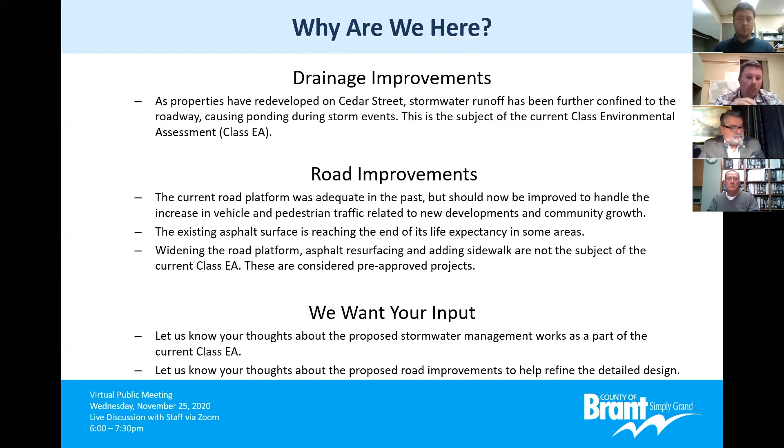And we want your input. We've divided this point out into two separate bullet points because we want your input specific to the stormwater improvements and specific to the road improvements.

So we'll run through a quick outline. We're going to cover the Class EA process. Stormwater management is the first priority for this meeting, so we'll talk about that first: the existing conditions, the problem statement, the alternatives we've identified, and the recommended preferred alternative. Then we'll jump over to road improvements, other considerations like water and sanitary servicing and street lighting, and then we'll cover the next steps and the project schedule.

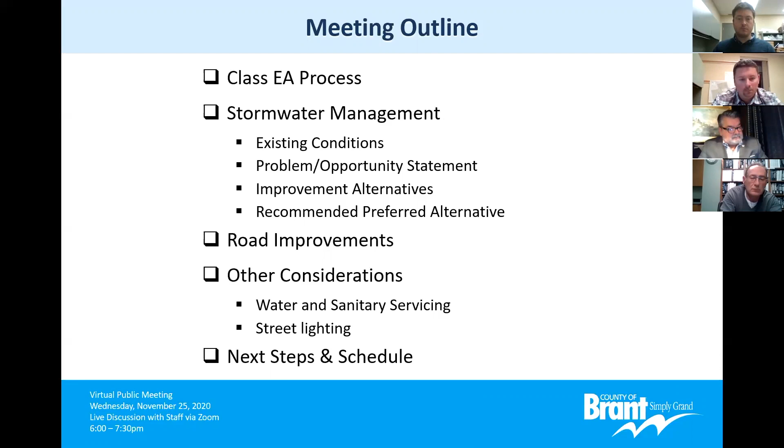Jumping into the municipal Class EA process, if you've been to one of these public meetings before you're familiar with this image. This diagram shows the process we need to follow for any larger scale municipal project. There are Schedule A, Schedule B, and Schedule C projects. Schedule C projects must go through phases 1, 2, 3, and 4 before moving into phase 5, which is implementation, design and construction. Schedule B projects only need to go through phases 1 and 2 before advancing to phase 5. Schedule A or Schedule A plus projects are considered pre-approved.

They're the simple projects, like repaving a road, something kind of an everyday occurrence for us. So they're pre-approved, but we still want your input on those things.

So we initiated this Class Environmental Assessment as a Schedule B project because of the possibility that we might not be able to fit everything for stormwater in the road allowance. If we need to go outside of the road allowance, that bumps it up to a Schedule B project. So that's the process we're following for this project, even though some of the projects fit into the Schedule A category.

So where we are here tonight is phase 2. If you look under phase 2 at the yellow highlighted box, this is the point of contact where we reach out to the public and ask for your input on what we've prepared so far.

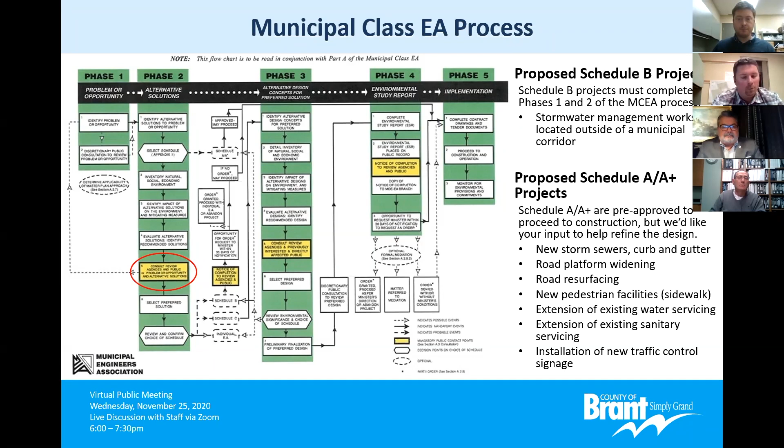Okay, covering the stormwater existing conditions, this is an aerial image of Cedar Street, and it's a little outdated. To the west there are two vacant land parcels that are actually fully developed now into condo developments. You'll also notice there's really no stormwater piping on Cedar Street. The storm sewers in the area are shown as the green lines - you'll see some on Rest Acres Road, some on Laurie Ann Lane, just coming down to Cedar Street. So there's really nothing there yet.

Storm sewers are generally designed to handle a 5-year storm flow, to carry that water away without ponding on the road, and there are usually some overland flow routes determined as well. Cedar Street really doesn't have any of that. And I'm sure, as residents have seen many times, that water doesn't really have anywhere to go, so it ponds in several areas of the street.

Because we don't have stormwater management on Cedar Street, all of these new condo developments have been required to handle their stormwater flows and runoff on their own site. So what they're doing is infiltrating all of that - holding it in ponds and infiltrating it into the ground.

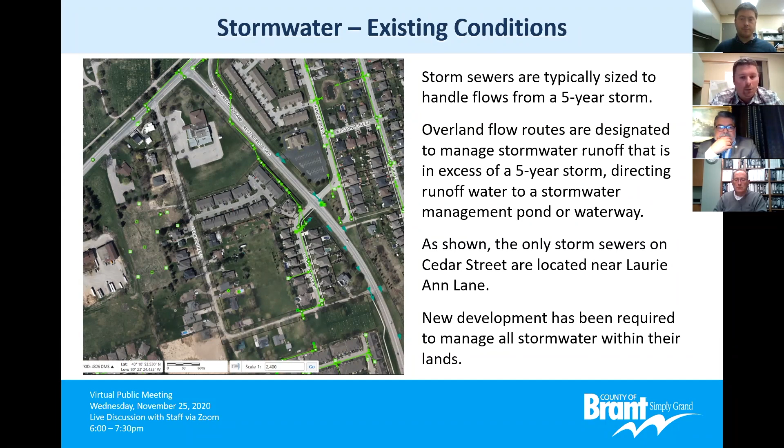Next slide here. So as I mentioned, Cedar Street doesn't have any storm sewers extended to it yet. These are some areas where I've observed ponding during heavy storms, probably a 5-year storm. I've heard from some residents that this is fairly accurate - they might be a little bit bigger, a little bit smaller, and maybe shifted a little, but generally this is what you see during a storm event. The storm flows generally divide Cedar Street into a south drainage area and a north drainage area.

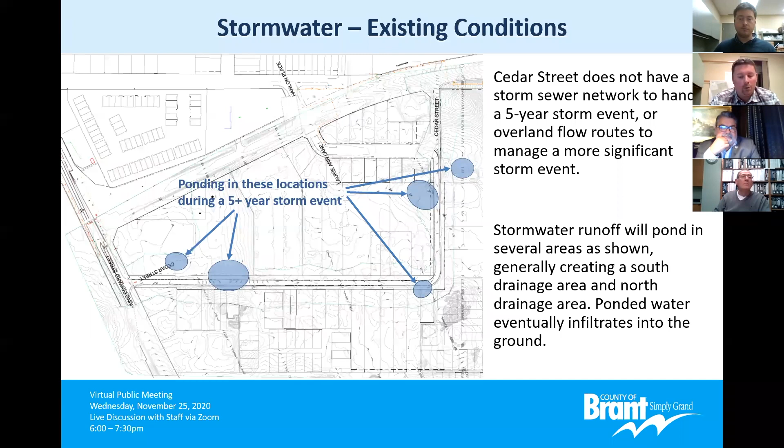So this brings us to our problem or opportunity statement. I'll just read through it. I know it's a little bit long, but I'll read through it.

Road improvements are required on Cedar Street to provide a safe corridor for all road users. An urban road cross section will be implemented with a wider road platform, curbs, gutters, and sidewalk. As a result of the planned roadway improvements, there will be a need for improved stormwater drainage on Cedar Street to prevent long-duration ponding in the roadway and on adjacent properties. The objective of this study will be to identify the most preferred alternative that is technically sound, cost-effective, socially acceptable, and environmentally responsible.

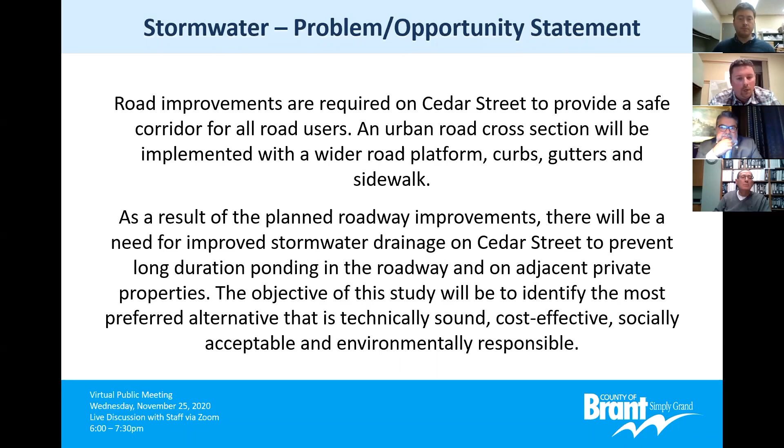So we developed a few different alternatives that we think are reasonable and practical for Cedar Street. The first one is do nothing. That's the alternative that we always have to consider in class environmental assessments, just considering it as a baseline that we compare all the other alternatives to.

Number two is implementing some stormwater management and drainage improvements within the Cedar Street road corridor, and that could include storm sewers, controlled ponding in some areas, or low impact development features. That's generally trying to infiltrate as much water into the ground.

Number three would be stormwater management and drainage improvements outside of the Cedar Street road corridor, like if we can't fit it all in the road corridor, do we need land to do other things with, possibly a dry pond or a wet pond, something to hold the water, and also low impact development features outside of the road corridor. So it's the same as two, but outside of the road corridor.

And number four is actually a combination of numbers 2 and 3, where we have storm sewers or low impact development features in the road and also outside of the road.

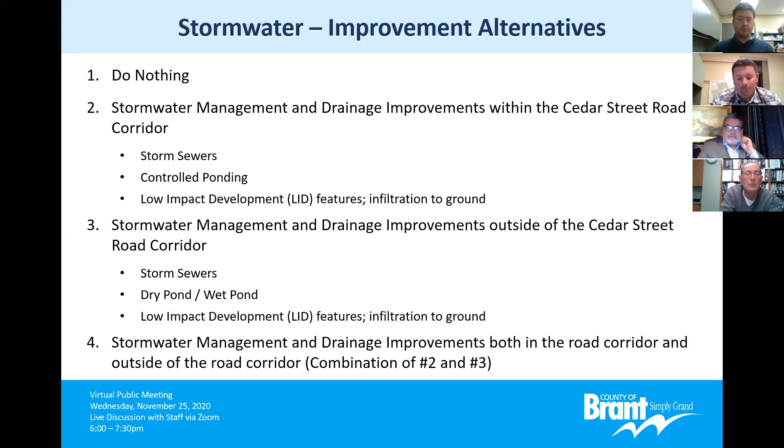There are also social and cultural factors that we weigh these alternatives against: the construction activity and the disturbance to all of the residents and property owners, the land use requirements, whether there are archaeological or heritage resources that we need to factor in, and whether there's any impact to community events.

Of course, we consider natural environment factors like disruption to the terrestrial landscape or ecosystem, the effect on surface waters and the receiving stream, or the impact to the groundwater, and whether we're considering climate change in our design as well.

And last but not least, economic factors. We always have to consider the capital costs, operation and maintenance costs, long-term costs, and whether there's an impact to the local economy.

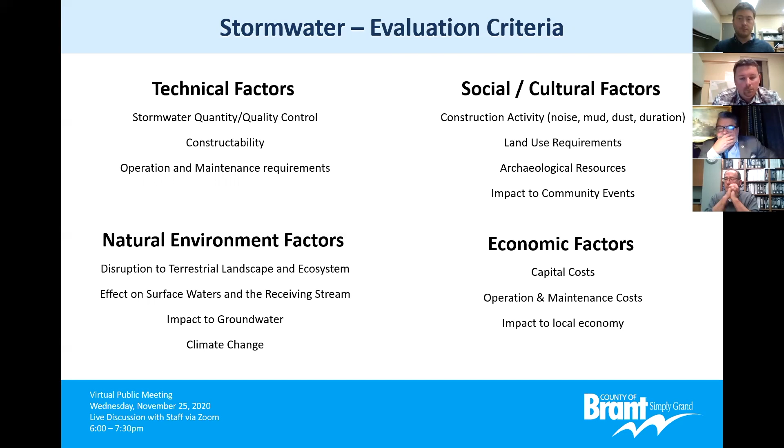Considering these two areas separately, we looked at the south drainage area first. The first alternative doesn't satisfy the problem statement, it doesn't solve the problem. The second alternative would satisfy the problem statement, and we can fit everything within the road corridor.

The third alternative outside of the Cedar Street road corridor isn't a possibility because there's no land available for that. Everything's privately owned. There's nowhere to really put a pond or a low impact development feature outside of the road corridor, and that rules out number 4 as well.

So because we have an existing storm outlet at Laurie Ann Lane and we can fit everything in the road corridor, that's the preferred alternative that we're recommending.

So that would look like storm sewers connecting to the storm sewer at Laurie Ann Lane. We're recommending a swale on the north side of Cedar Street against the vacant land there that's going to be developed in the very near future, and some LID features like an infiltration gallery under that swale or ditch against that development property on the north side of Cedar Street.

Now, because we're recommending that as the alternative for the south drainage area, that's actually a Schedule A+ project because it's all within the road corridor, so a pre-approved project.

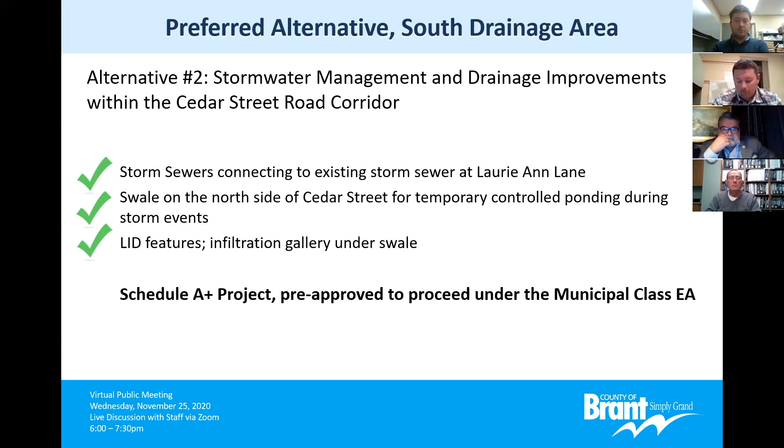But moving to this, this is what it would look like here. The drawing showing the detail on the road is a little outdated, but what this slide is supposed to be showing is just a drainage swale, or what's going to look like a ditch on the north side of Cedar Street, and outletting over here at the existing Laurie Ann Lane storm sewer.

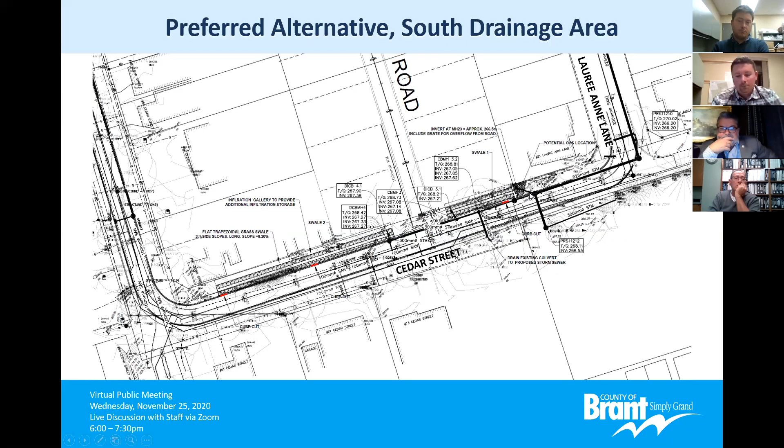Moving over to the north drainage area, do nothing, again, doesn't satisfy the project's problem statement.

Number two, we will have to implement something in the roadway. We need sewers to convey the flows to wherever our outlet needs to be, but we can't fit everything there because there's no outlet at the north end of Cedar Street. There are existing sewers on King Edward, but they are too high to pick up the flows from Cedar Street.

So we've investigated alternative outlets.

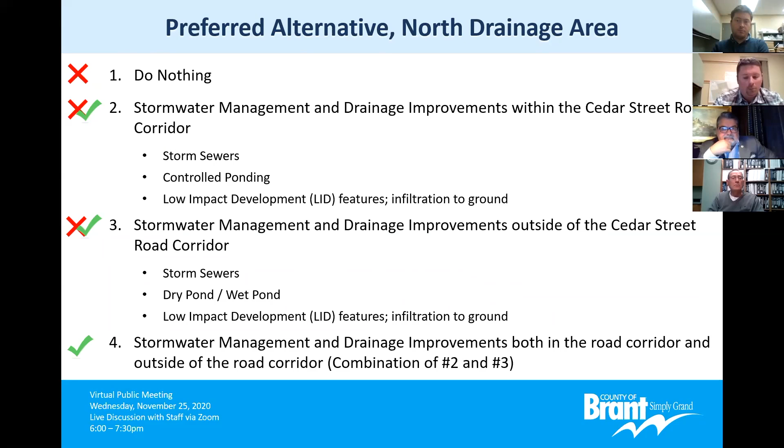That needs to be part of the solution because we need lands outside of the road corridor, but that doesn't fully satisfy the problem statement because we need some infrastructure in the Cedar Street road allowance to bring it to the outlet. So we're suggesting a combination where we install sewers on Cedar Street, but we do need some use of private land to get there, and I'll show you what that looks like here.

So storm sewers on Cedar Street and through the Cedarview Church property, connecting to sewers on Rest Acres Road. Because the existing sewer on Rest Acres Road is nearing its capacity, we can't just dump everything into that sewer. We need to hold water, both at the south end and the north drainage area as well, so we do need to pond some water, temporarily hold it, and let it slowly flow back into the sewers when there's capacity available after the storm event. While it's being held, it will also infiltrate both at the south and these ponding areas at the north.

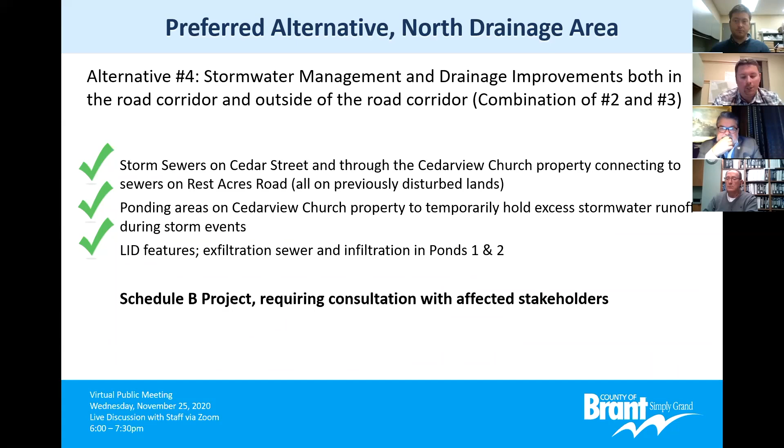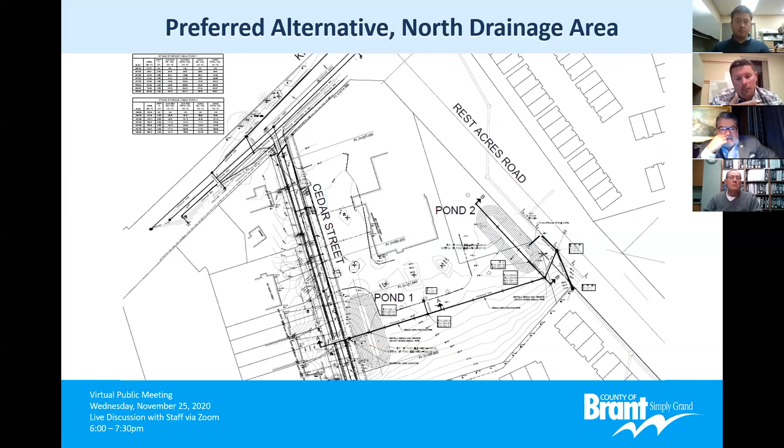We're recommending some LID features, an exfiltration sewer, infiltration ponds, and this is what that looks like conceptually. I know there's some detail we can't really see on the slides here, but what we're trying to show is a sewer going through the Cedarview Church property, connecting to existing sewers at Rest Acres Road, and then two ponding areas on that property, one close to Cedar, where it already ponds right now, and one a little bit closer to Rest Acres Road. The water will temporarily pond there, and in less than a day, it'll flow back into the sewers.

This is just an overview showing the overall plan here. We're suggesting storm infrastructure at the south end of Cedar Street, flowing into Laurie Ann Lane, and then a divide between those drainage areas right here, with everything flowing north along that green line up to a ponding area flowing across the church property. These are acting as surcharge ponds for whatever excess flow the existing sewer on Rest Acres Road can't handle, and while the water is ponded there, it'll infiltrate into the ground a little bit as well.

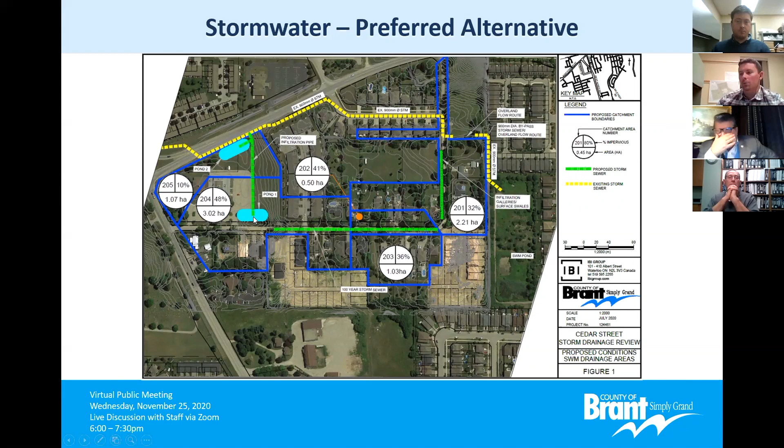That was just a very brief overview of what the recommendations are. If you like the details, we do have a stormwater management report in draft form available on the county website. It has all the details on how they modeled everything. We've modeled a 100-year storm, and we've calculated that this will handle flows from a 100-year calculated storm.

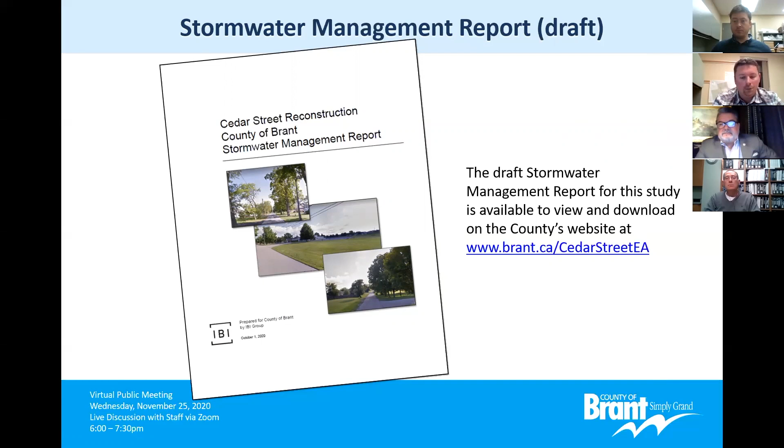Okay, so that covers the Schedule B portion of the class environmental assessment on the stormwater management side. But this project includes more than that. Like I said, they're mostly Schedule A projects, but we want to present them to all the property owners and all the road users here and get some input. So that includes some planned road improvements, extending water and sanitary servicing where it's missing right now, and improving the corridor for pedestrian and cycling through Cedar Street.

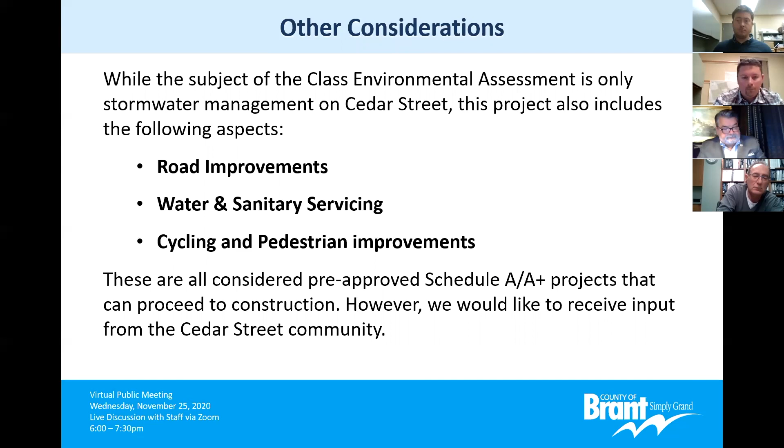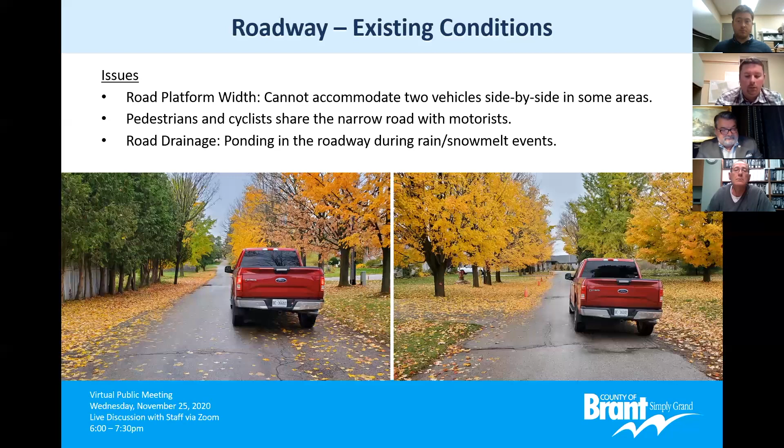Moving ahead to the roadway existing conditions, I've shown a photo there with one vehicle. We all know that Cedar Street is very narrow at the south end, even as you go north—too narrow to fit two vehicles. You can see vehicles right up onto the front yards of some of those homes, and it's not ideal for pedestrian use either. So we're proposing that we widen the platform of the road, not significantly, just out to about 7 meters, but then install a sidewalk to the side as well to improve safety for pedestrians.

Sidewalk on the west side, and at the south end it'll be on the south side, so it goes around the outside of the bend on Cedar Street. And on the south end, another typical cross section.

This one is showing that drainage swale that I mentioned as well. This is maybe a little bit exaggerated, it's not as deep as it looks. The slopes are 3-to-1, so the grass can be cut easily with a riding lawnmower.

Below that is an infiltration gallery, shown here as clear stone bedding. Water ponds there temporarily, less than a day, and runs back into the sewer when the sewer can take it. In the meantime, as it's ponding, it also infiltrates into the ground.

Again, the sidewalk on the south side, and that sidewalk will run all the way to connect over to Rest Acres Road.

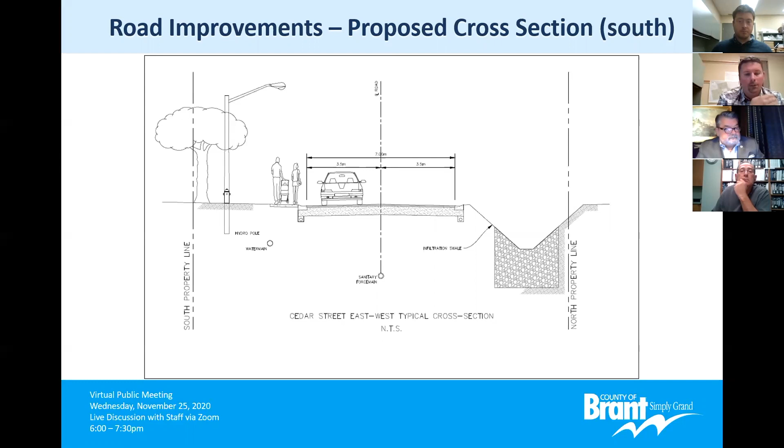Water and wastewater servicing extensions. Cedar Street already has a water main looped through it, but not all properties have a water service connection. So as part of this project, while we're ripping up the road, we'll be extending a water service to all of those unserviced properties.

Similarly, Cedar Street has a sanitary sewer on the north-south section, but it ends just north of the bend on Cedar Street. We can't extend that gravity sewer any further, it's very shallow where it ends.

So what we need to do is extend a common sanitary force main beyond that sewer to the south to service all the properties at the south end of Cedar Street. They'll all need to be on a grinder pump package. We'll talk to all those homeowners individually since it doesn't apply to everyone.

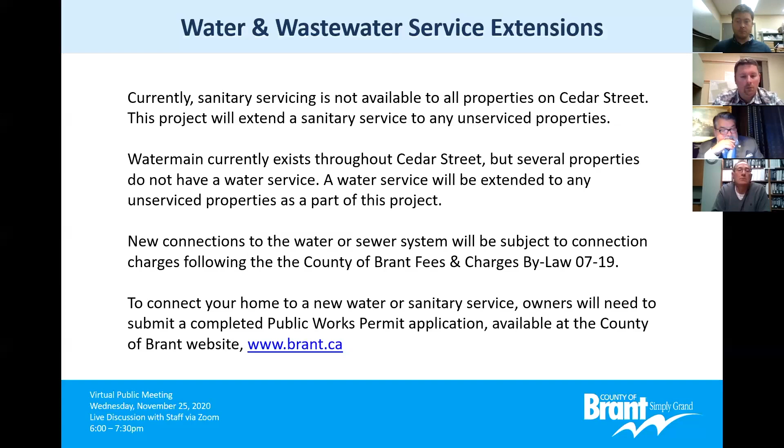After this project, water and sewer services will be available to everyone, and new services will be subject to connection fees per the Brant County Fees and Charges Bylaw 07-19, which we can provide as well. To connect your home to the water or sanitary service, owners will need to complete a public works permit application. We'll provide more information after all of the work is done to everyone who's affected.

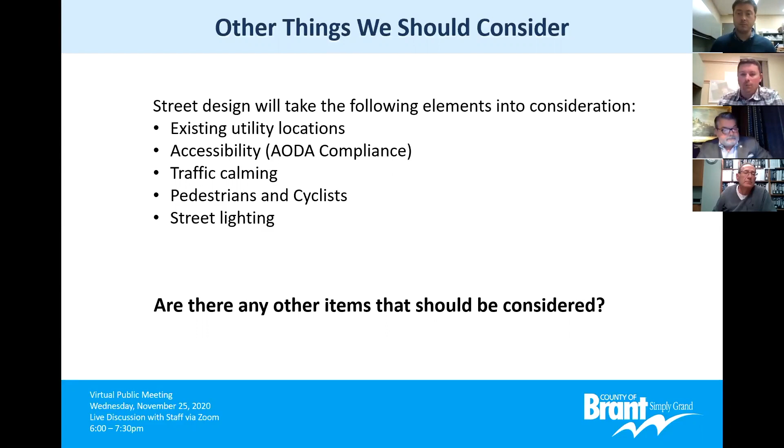In high volume storms, like a 100-year storm, there'd be water sitting around for days currently. We're hoping that in the future it'll be pretty much gone in a day. There's really no way to take this water away instantaneously without having a huge pipe all the way down to the Nith River, and that's not something the Ministry of Environment or the GRCA considers acceptable practice. Just in case anybody was wondering why that's required. Thanks, Rob.

We've tried to anticipate some of the questions residents might have about the project so far - I think we have six here. The first one is, how many trees will be removed? Trees will be saved whenever possible, but a few will need to come out.

There's one large tree at the corner, right at the bend of Cedar Street, that needs to come out because it's in the way of the bend. There's also a row of cedars and a couple more as you go north, and they should be shown in the drawings as a conflict. Whenever we can save the trees, we're trying to, but there are a few that will have to come out.

How long will construction last? If we can go ahead and do it in the summer and get good summer weather, this should be a 2-month project, not including some of the restoration work that usually carries on for a couple months after. But the bulk of the work, where the contractor's working in the road and it's very messy, should be 2 months.

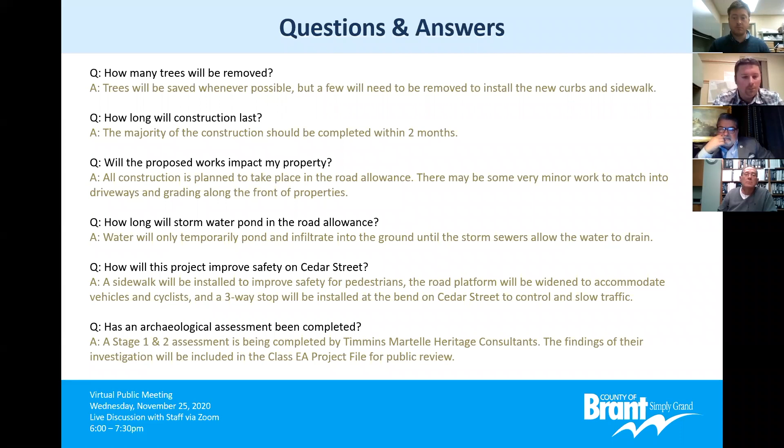And just a summary, why are we here right now? The time is right. We want to improve the safety of the road, widen it out, add some sidewalks. But when we do that, we also want to improve the stormwater drainage, and that requires us to follow the municipal Class EA process. Because we're proposing something that's outside of the road corridor, it bumps it up to a Schedule B project, which is why we're here tonight.

We want to receive your input related to that stormwater component, but we also want to receive your input related to the Schedule A projects, like the road work, the sidewalk, street lighting, water and sewer extensions, all of those other things.

Next steps: we'd like to receive your comments for the remainder of November and the month of December. We'll need to complete the archaeological assessment through December and into the new year. We'll finalize the project file for the stormwater component, put it out for a 30-day public review period in January or February, and then proceed with detailed design through the winter months and hope for construction in the spring or summer of 2021. That's our goal, is to be out there digging next summer.

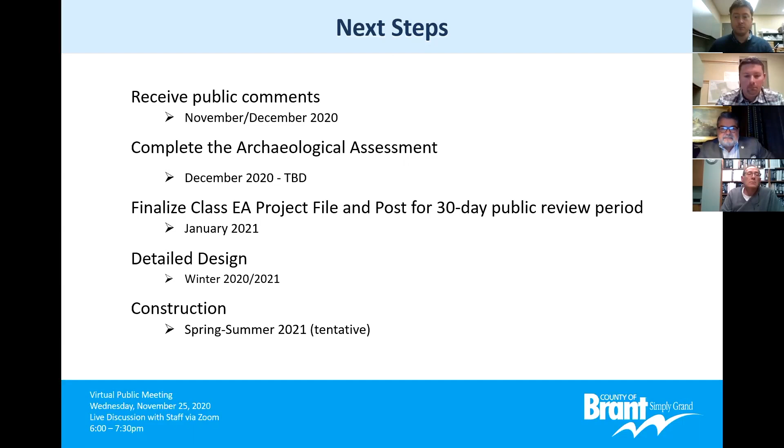Like I said, we want your input. There's two methods tonight: submitting your questions so we can open up the floor for questions, but then also the comment sheets that are available for download. You can fill them in Microsoft Word by typing it in, or print it out and handwrite it in, email it into our office, or drop it by our office. We'd like to hear from you. Hopefully we're on the right track.

And with that, maybe we'll look at the questions again. Okay, so some have been answered already. Yeah, I answered some of the easy ones. Oh, thanks, Rob. Perfect.

So will the dry pond be the one at 23 Cedar that's already existing? Can it maintain a large degree of water? If so, no, the proposed ponds are on the church property. That's right.

So the hydro lines are staying above ground. Yeah, that's correct. Will there be street lighting added? Yes, that's the plan.

The plan is to increase the road width to 7 meters. What is the current width? It varies - thanks, Rob - 5.5 to 6 meters.

Will this project take place in 2021 or 2022? Thanks, Nick, you got that one. So the plan is for 2021 unless something slows us down for some reason.

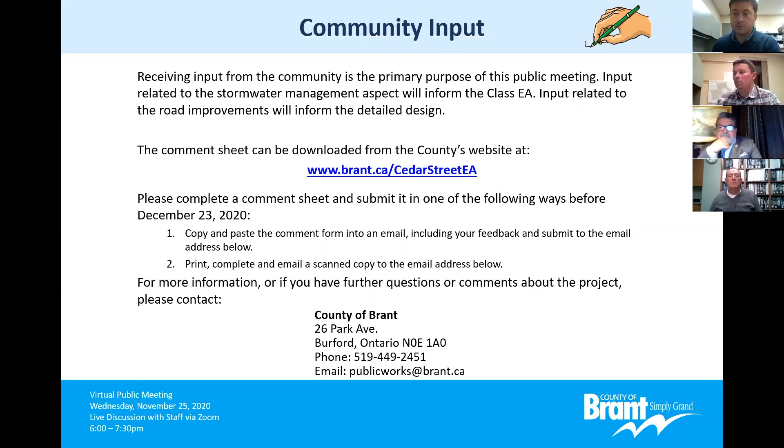As far as clearing the snow, that's a good question, we will have to look into that. That sidewalk will be cleared by county staff because it's part of the major trail. We also will be clearing the new multi-use trail on Rest Acres when it's constructed. I think part of it's constructed now and part isn't. Certainly the construction on Rest Acres Road will not be entirely finished this year, but it is going to be open to traffic for the winter. The final construction of the last two roundabouts, the last sections of the four-laning, and all of the landscaping will happen in 2021.

Robert, are you saying that the sidewalk on all of Cedar Street would be cleared, or just that section? That section and the closed section of the road. Just the closed section, yes. Okay, thank you.

Next one is Mark: can you meet with me to discuss the tree removal, etc.? Of course, if anyone wants to meet on site, I'd love to come out and meet with you so we can talk about the details specific to your property. That's no problem, I've already met with a few people. I've got your name, and I'll get in touch with you after the meeting so we can work out a time to meet.

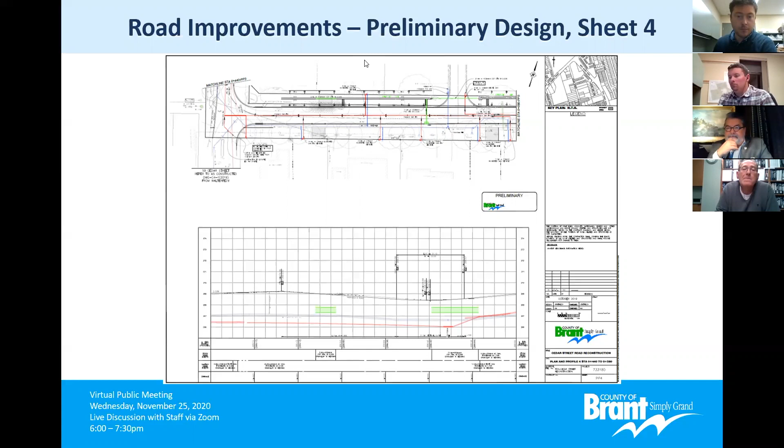Gary, what does it mean here on the thing here when we answer live? Does that mean that's how we intend to do it, or because where you type the answer in, you push type answer and you type the answer and then the question disappears and goes over to the answered questions? I'm fairly new with webinars, so I don't know the answer to that. If you wanted to try one and see what happens, it might not let you type. It may just let you verbally answer the question, which you guys already have done.

Okay, there's a question here about the normal width of a street in Paris. Well, the width of a street, there's several different classes of streets. If we talk about a street like this, so if this was being developed as a subdivision, a new subdivision, and you guys help me out here, but I think 8.5 meters would be a fairly standard width for that, instead of the 7 that we're proposing here. Yeah, 8 or 8.5, yeah.

Certainly, if you get into arterial roads, some of them we're building 12 meters wide, but of course then you're considering parking on some of those as well. 8.5 meter streets in a subdivision, usually they would allow parking on one side.

Yeah, and we should keep in mind those are today's standards, but all the streets in Paris were built at many different times when standards were different and always changing. So throughout Paris, you'll see various sizes, especially if there's parking or not parking, or what the makeup of the community is. So generally, any street that we would rebuild, we would try and have at least a 6-meter platform.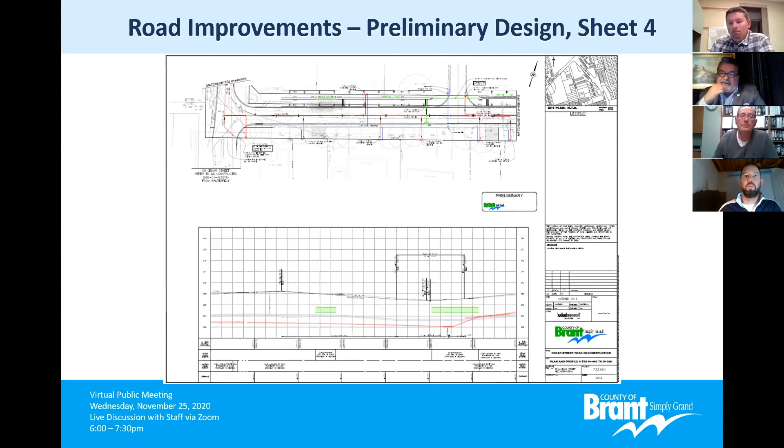But I think starting this early with all this conversation, everyone should end up reasonably happy. And if you're not, I'm just typing in my address here. Someone's asked for it, I did it for you, Mayor Bailey. Oh, thank you. So yeah, thank you for coming. And if there's anything else we can do for you before we start, just let us know. It's easier to fix it before we begin than have to stop halfway through. So thank you very much for coming out tonight.